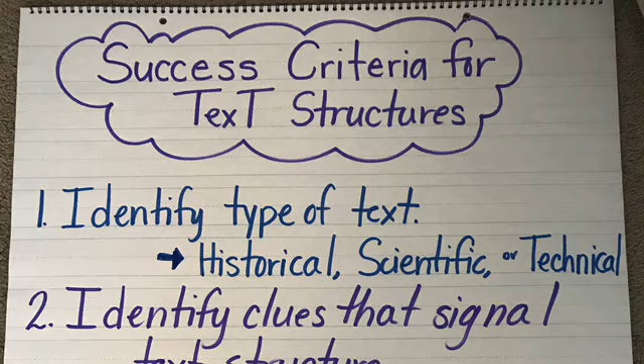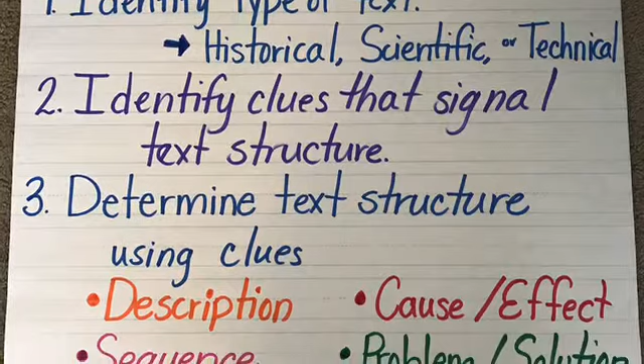Guys, today when we start our next module here, we're going to be looking at text structures again, just as we did earlier in the year. So remember, identify history, science, or tech to find the clues of what will come next. Determine the structure just so you know how to get your ideas to flow.

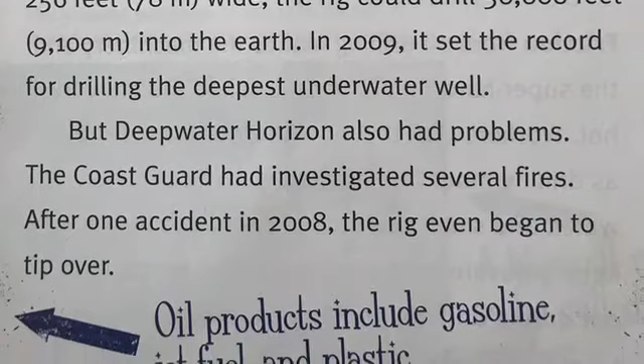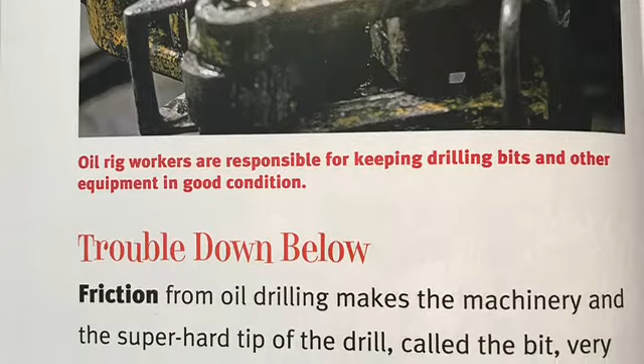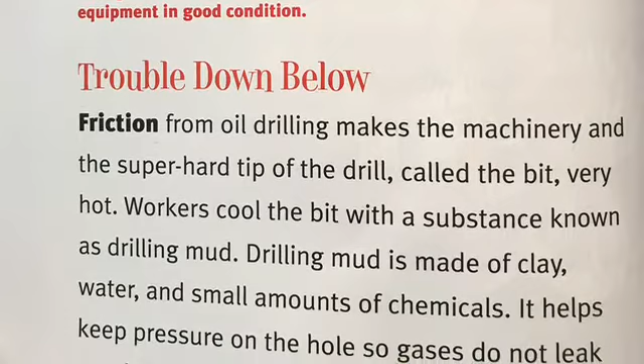Trouble down below. Friction from oil drilling makes the machinery and the super hard tip of the drill, called the bit, very hot. Workers cool the bit with a substance known as drilling mud. Drilling mud is made of clay, water, and small amounts of chemicals. It helps keep pressure on the hole so gases do not leak out during drilling. Drilling mud is backed up by a blowout preventer, or BOP. A BOP is a device that checks for dangerous changes in pressure around the drill.

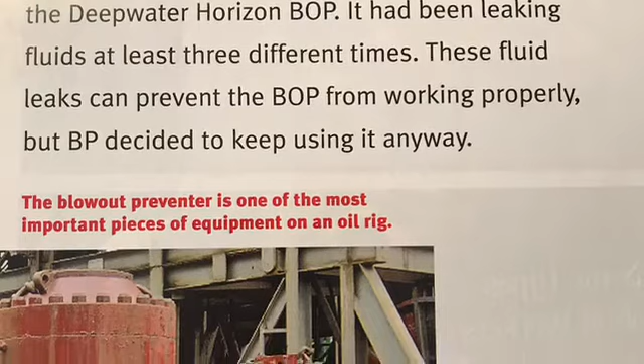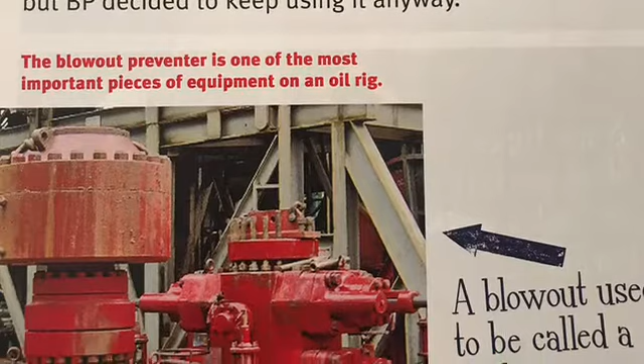A blowout is an uncontrolled release of gas or fluid pressure. It is one of the biggest dangers faced by oil workers. In late March 2010, workers noticed damage to the Deepwater Horizon BOP. It had been leaking fluids at least 3 different times. These fluid leaks can prevent the BOP from working properly, but BP decided to keep using it anyway. And it shows that a blowout used to be called a gusher.

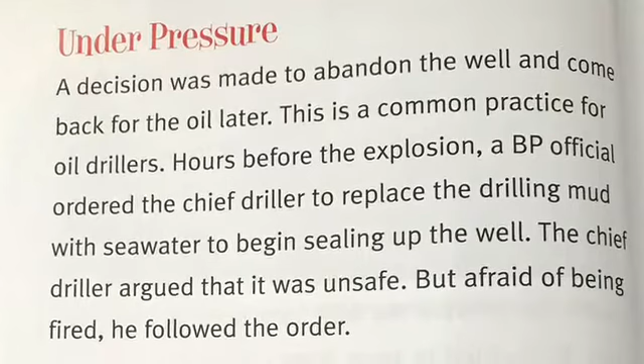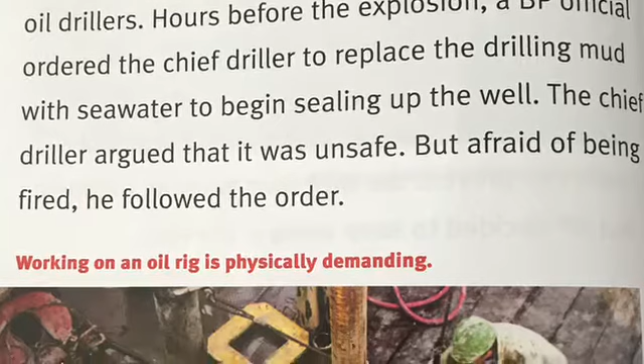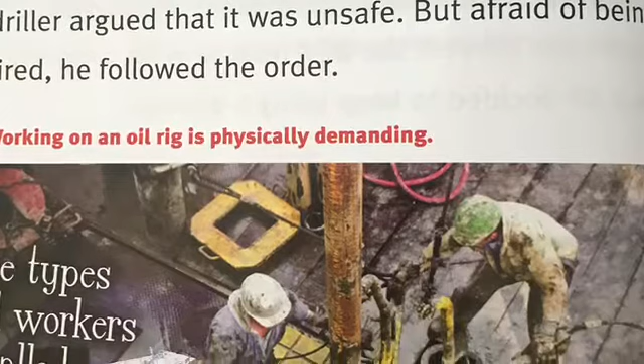Under pressure, a decision was made to abandon the well and come back for the oil later. This is a common practice for oil drillers. Hours before the explosion, a BP official ordered the chief driller to replace the drilling mud with seawater to begin sealing up the well. The chief driller argued that it was unsafe, but afraid of being fired, he followed the orders. Speed. The next step was to plug the well with cement.

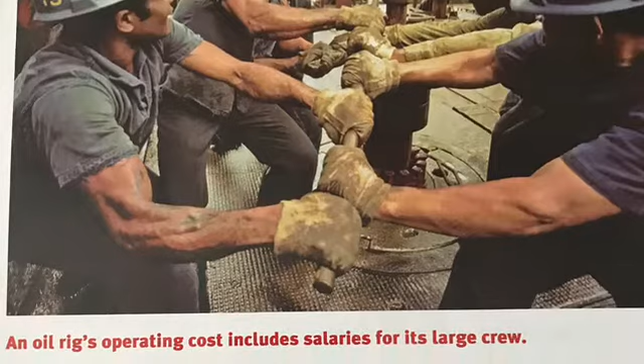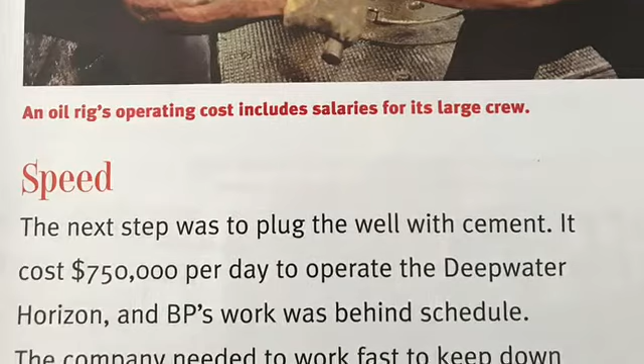It cost $750,000 per day to operate the Deepwater Horizon, and BP's work was behind schedule. The company needed to work fast to keep down costs. They did not take the time to make sure the cement had dried properly.

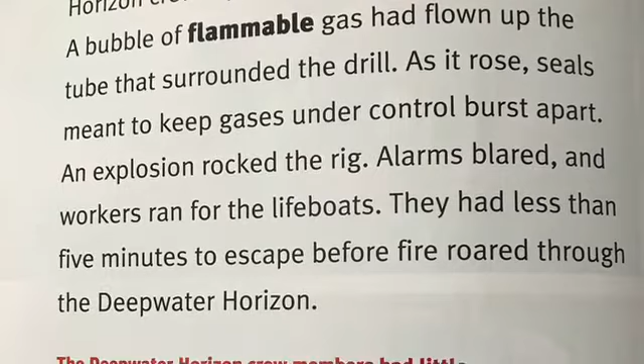The accident. On the night of the accident, the Deepwater Horizon crew reported a loud hissing noise. A bubble of flammable gas had flown up the tube that surrounded the drill. As it rose, seals meant to keep gases under control burst apart. An explosion rocked the rig. Alarms blared, and workers ran for the lifeboats. They had less than 5 minutes to escape before the fire roared through the Deepwater Horizon.

So thinking about our success criteria, I want you to think about what were some clues that you found while I was reading in the text structure. And looking at these clues, I have the different types of text structures shown for you. We have problem and solution, comparing and contrasting, sequencing, description, and cause and effect. So which one would you think would be best to use to create our visual for this text?